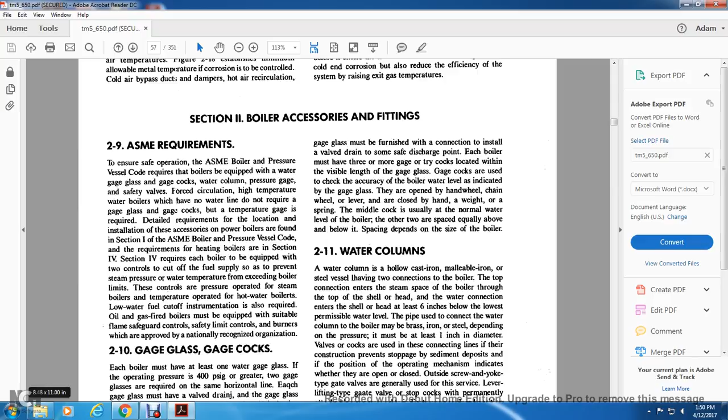Section 4 requires each boiler to be equipped with two controls to cut off the fuel supply to prevent steam pressure or water temperature from exceeding the boiler limits, a pressure-operated control for steam boilers, and a temperature-operated control for hot water boilers. A low water fuel cutoff instrument is required. Oil and gas fired boilers must be equipped with suitable flame safeguard controls, safety limit controls, and burners which are approved by a nationally recognized organization.

210, Gauge Glass and Gauge Cocks. Each boiler must have at least one water gauge glass, and if operating at 400 psi or greater, two gauge glasses are required on the same horizontal line.

Each gauge glass must have a valved drain. The gauge glass pipe connections must not be less than a half inch of pipe inside diameter. The lowest visible part of the gauge glass must be at least 2 inches above the lowest permissible water level, which is defined as the lowest level at which there is no danger of overheating any part of the boiler during operation. Horizontal fire tube boilers have the glass set with at least 3 inches of water over the highest point of the tubes.

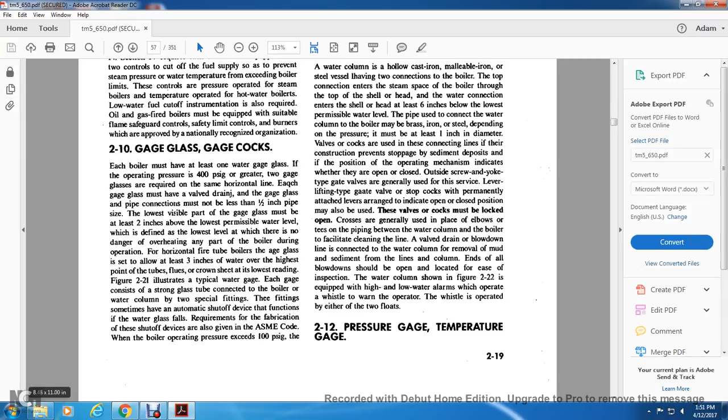Requirements for fabrication of these shut-off devices are given in the American Society of Mechanical Engineers Code. When the boiler operating pressure exceeds 100 psi, the gauge glass must be furnished with a connection to install a valve drain with safe discharge.

Each boiler must have 3 or more gauge or try cocks located within the visible length of the gauge glasses. Gauge cocks are used to check the accuracy of the boiler water level indicated by the gauge glass. They are opened by a hand wheel, chain wheel, or lever, and closed by hand or by a weight or spring.

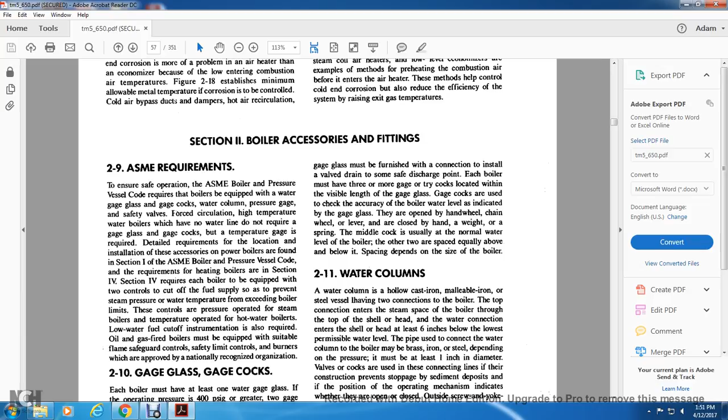The middle cock is usually at the normal water level of the boiler. The other cocks are spaced equally above and below it. Spacing depends on the size of the boiler.

211. Water columns are hollow cast iron, malleable iron, or steel vessels that have connections with the boiler. The top connection enters the steam space of the boiler through the top of the shell or head. The water connection enters the shell or head at least 6 inches below the lowest permissible water level. The pipe used to connect the water column to the boiler

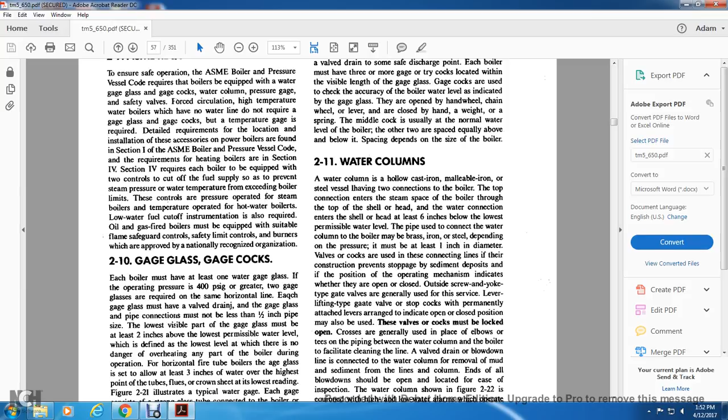may be brass, iron, or steel, depending on the pressure. It must be at least 1 inch in diameter for the valves. Cocks are used for the connecting lines if the construction prevents stopping of sediment deposits. If the position of the operating mechanism indicates whether they are open or closed, outside screw and yoke type gate valves are generally used, or lever-operated lifting type gate valves or stop cocks permanently attached. Levers arranged to indicate open or closed position may also be used.

The valves or cocks must be locked in the open position. Crosses are generally used in place of elbows, tees, and piping between the water column and the boiler to facilitate cleaning. The valve drain and blowdown line is connected to the water columns for removal of mud and sediment from the lines and columns. Blowdown valves should be open and located for ease of inspection of the water column, as shown in Figure 2-22.

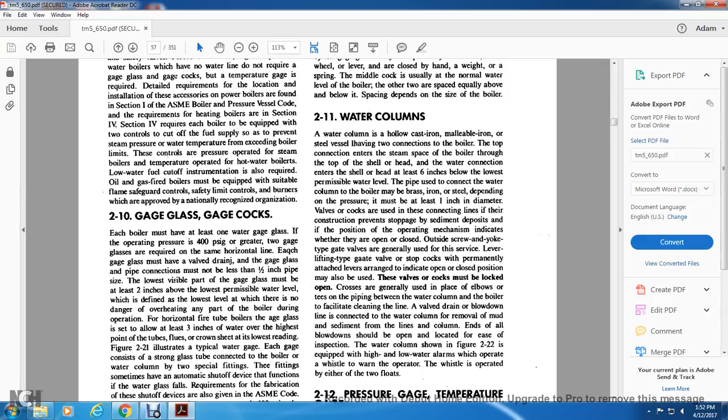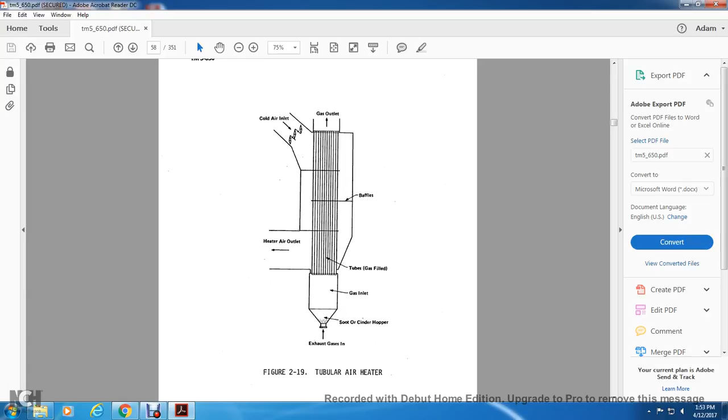This shows the tubular air heater: core and gas outlet, cold air inlet, baffles, heater air outlet from the gas, tube's gas filled with gas inlet, soot or cinder hopper, and exhaust gases in.

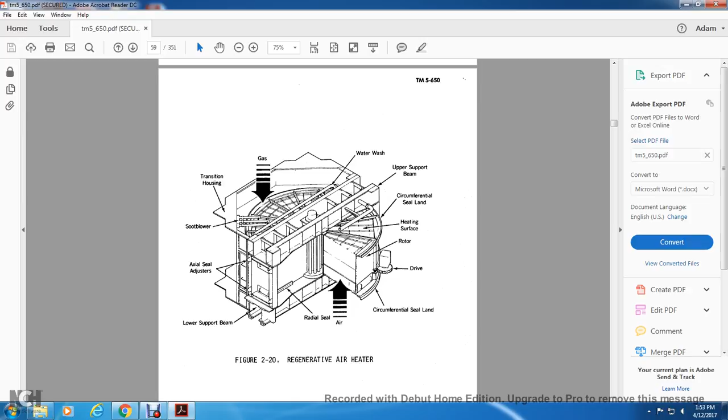This shows the regenerative air heater: transition housing, sootblower, axial seal adjusters, lower support beam, radial seal, circumferential seals, land drive, rotor, heating surface, circumferential seal land, upper support beam, water wash, and gas.

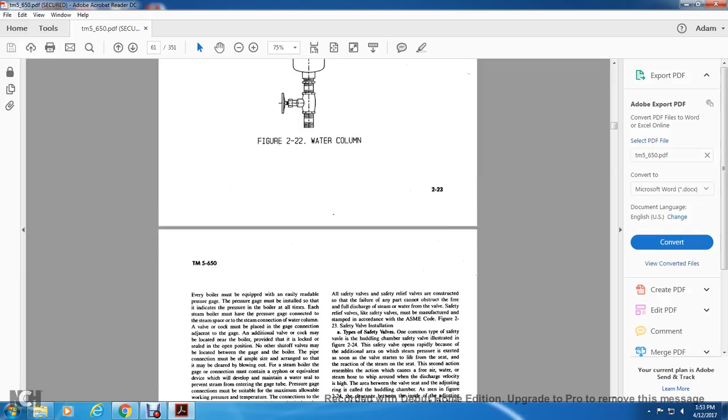Every boiler must be equipped with an easily readable pressure gauge. The pressure gauge must be installed so as to indicate the pressure of the boiler at all times. On each boiler the pressure gauge must be connected with the same connection as the water column. A valve or cock must be placed in the gauge connection adjacent to the gauge.

An additional valve or cock may be located near the boiler, provided with a lock or seal to keep it in the open position. No other shut-off valves may be located between the gauge and the boiler. The connecting pipe must be of ample size so that it may be cleared by blowing out.

The steam boiler gauge connection must contain a siphon or equivalent device to develop and maintain a water seal to prevent steam from entering the gauge tube. The pressure gauge connections must be suitable for the maximum allowable working pressure and temperature.

The connection to the boiler must be not less than 1/4 of an inch standard pipe size where steel or iron pipe or tubing is used. There must be at least 1/2 inch inside diameter. The dial of the pressure gauge must be graduated to approximately double the pressure of the safety valve setting.

This should never be less than 1 1/2 times the pressure, because every hot water boiler must also have a temperature gauge located where it can be readily connected. The temperature gauge must be installed to indicate the water temperature near the outlet connections at all times.

Section 213, safety valves. Safety valves are installed to prevent excessive pressure buildup in the boiler. Superheater and economizer safety valves are designed to quickly pop open to the full open position when the steam pressure rises to a set point, and to quickly close when the pressure drops a preset amount, known as the blow down or blow back.

The valve must close tightly without chattering or large leakage, and must remain tightly closed after reseating. Their construction, installation, and performance are rigidly prescribed in the American Society of Mechanical Engineers Code.

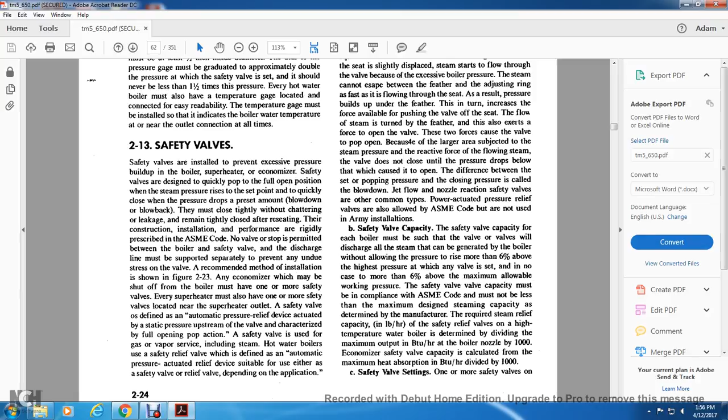The safety valve is used for gas or vapor pressure services, including steam and hot water boilers. A safety relief valve is defined as an automatic pressure-actuated relief device suitable for use as either a safety valve or a relief valve, depending on the application.

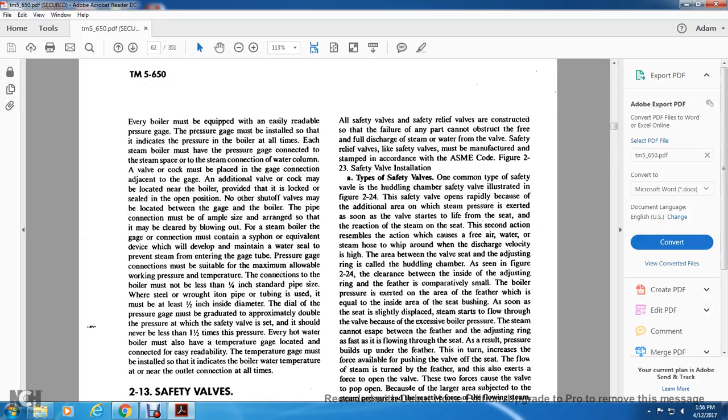All safety valves or relief valves are constructed so that the failure of any part cannot obstruct the full discharge of steam or water from the valve. Safety relief valves, like safety valves, must be manufactured and stamped in accordance with the American Society of Mechanical Engineers Code. Figure 223, safety valve installations.

Types of safety valves. One common type is the huddling chamber safety valve, illustrated in figure 224.

The safety valve opens rapidly because of the additional force with which the steam pressure is exerted as soon as the valve starts to lift off the seat and reaction steam acts on the seat. This action resembles what causes a fire hose to whip around when the discharge velocity is high. The area between the valve seat and the adjusting ring is called the huddling chamber.

As seen in figure 224, the clearance between the inside of the adjusting ring and the feather is comparatively small. The boiler pressure is exerted on the feather with an area equal to the inside of the seating surface. As soon as the seat is slightly displaced, steam starts to flow through the valve.

Because of the excessive boiler pressure, the steam cannot escape between the feather and adjusting ring as fast as it flows through the seat. As a result, pressure builds up under the feather. This increases the force available for pushing the valve off the seat.

The flow of steam turns with the feather and also exerts a force to open the valve. These two forces cause the valve to pop open. Because of the large area supported and subject to steam pressure and the reactive force of the flowing steam, the valve does not close until the pressure drops below that which caused it to open. The difference between the popping pressure and closing pressure is called the blowdown.

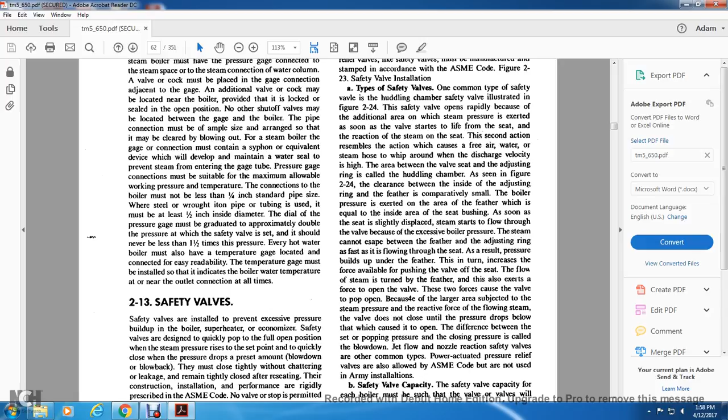Jet flow nozzle reaction safety valves are a common type. Power actuated pressure relief valves are also allowed by the American Society of Mechanical Engineers Code, but are not used in Army installations.

Safety valve capacity. Each boiler must have sufficient safety valve capacity so that the valves can discharge all the steam that can be generated by the boiler without allowing the pressure to rise more than 6% above the pressure at which the valve is set, and in no case more than 6% above the maximum allowable working pressure.

Per the American Society of Mechanical Engineers Code, safety valve capacity must not be less than the maximum design steam capacity as determined by the manufacturer. The required steam relief capacity in pounds per hour for the safety relief valve on a high temperature water boiler is determined by dividing the maximum amount of BTUs per hour at the boiler nozzle by 1,000. Economizer safety valve capacity is calculated from the maximum heat absorption in BTUs per hour divided by 1,000.

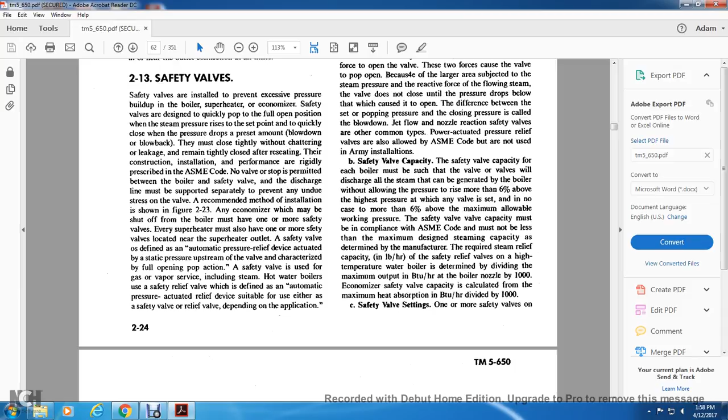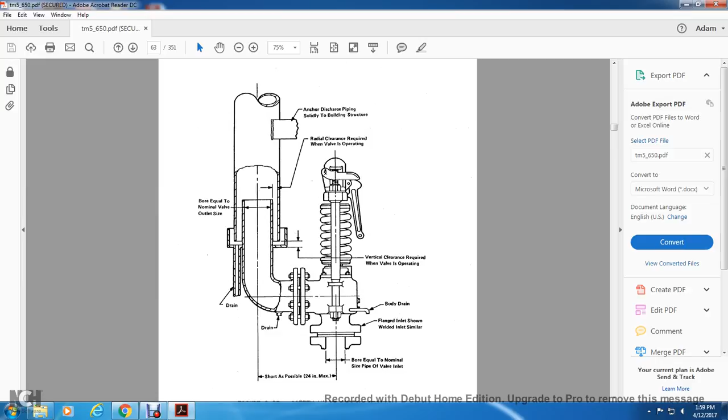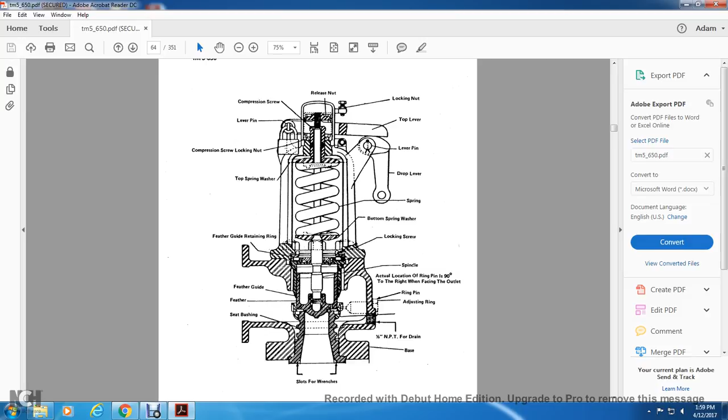Huddling chamber safety valve components: release nut, lock nuts, compression screw, lever pin, top lever, compression lock nut, lever pin, drop lever, spring, top spring washer, feather guide, retaining ring, bottom spring washer, locking screw, spindle, feather guide, feathers, seating bushing, base, 1/2 inch NPT for drain, adjusting ring pin, with the actual location of the ring pin at 90 degrees to the right when facing the outlet, and the spindle and locking screw.

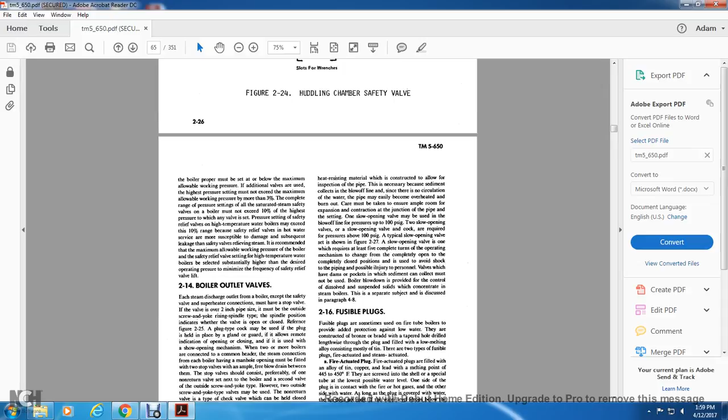The boiler must be set at or below the maximum allowable working pressure. If an additional valve is used with a higher pressure setting, it must not exceed the maximum allowable pressure by more than 3%, with the range of the proper pressure settings complete.

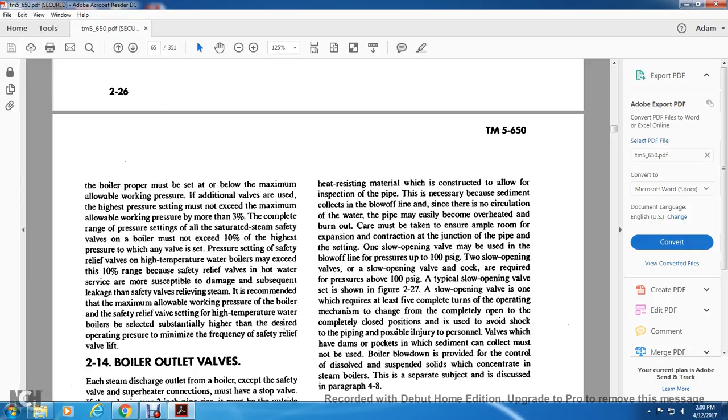2-14. Boiler outlet valves. Each steam discharge outlet from the boiler, except for the safety valve and superheater connections, must have a stop valve. The valve over 2-inch pipe size must be of the outside screw and yoke, rising spindle type.

With the spindle position indicating if the valve is open or closed. Refer to figure 2-25. A plug-type cock may be used if the plug is held in place by a gland or guard.

Always use remote indication for opening and closing, using a slow-opening mechanism. When 2 or more boilers are connected with a common header, the steam connection for each boiler and the manhole opening must be fitted with 2 stop valves, with ample free blow-down drain between them. The stop valves should consist preferably of one non-return valve set next to the boiler.

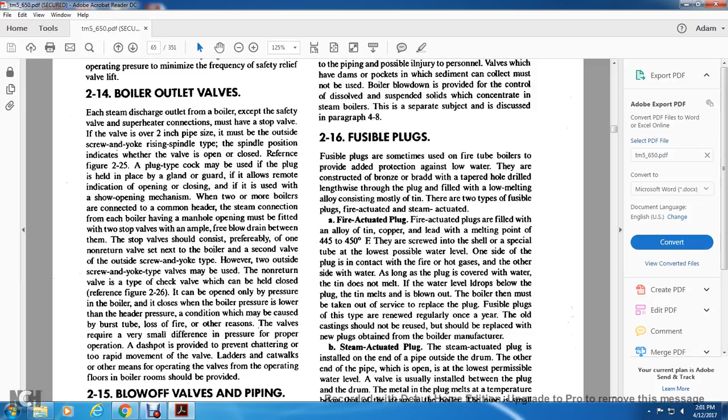The second valve is the outside screw yoke type. However, 2 outside screw yoke valves may be used instead of the non-return valve with a check valve type, which may be held closed. Reference figure 2-26. It can be opened by boiler pressure, but closes if the boiler pressure is lower than the header pressure—a condition which may be caused by a burst tube, loss of fire, or other reasons. The valve requires only a small pressure difference for proper operation. The dash pot is provided to prevent chattering and rapid movement of the valve.

Other means of operating the valves from operating floors in the boiler room shall be provided.

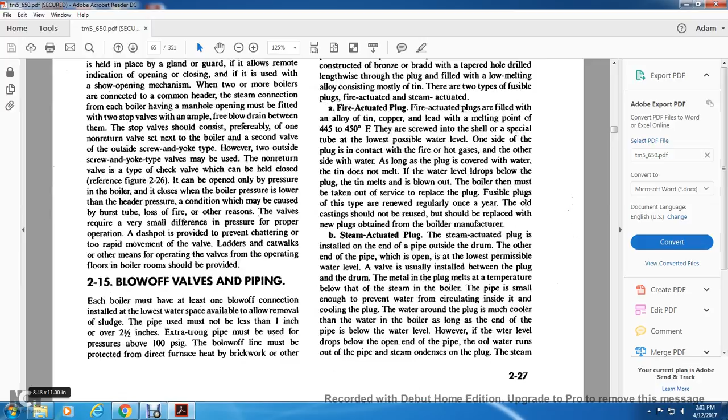Section 2-15, blow-off valves and piping. Each boiler must have at least one blow-off connection installed at the lowest water space available to allow removal of sludge. The pipe used must not be less than 1 inch or over 2.5 inches.

Extra strong pipe must be used for pressures above 100 psi. The blow-off line must be protected from direct furnace heat by brickwork or other heat-resisting material, constructed to allow inspection of the piping. This is necessary because sediment collects at the blow-off line. Since there is no circulation in the water, the pipe easily becomes overheated and burns out.

Care must be taken to ensure ample room for expansion and contraction at the junction of the pipe and setting. A slow-opening valve must be used on blow-off lines with pressure up to 100 psi. Two slow-opening valves, or a slow-opening valve and cock, are required for pressures above 100 psi.

A typical slow-opening valve is shown in figure 2-27. The slow-opening valve requires at least 5 complete turns of the operating mechanism to move from completely open to completely closed, which helps avoid shock to the piping and possible injury to personnel. Valves which have pockets where sediment can collect should not be used.

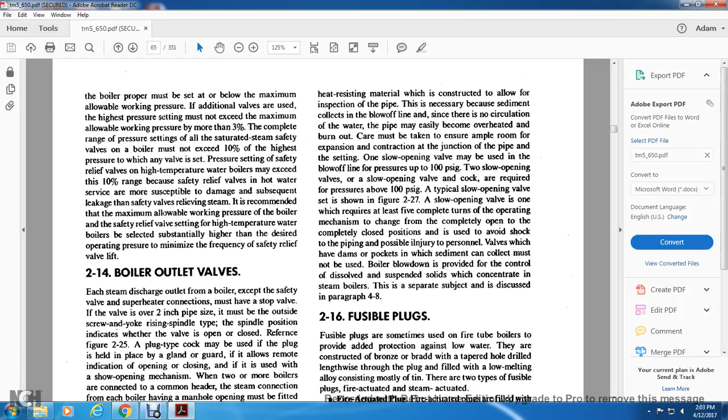The boiler blow-down is provided to control the concentration of suspended solids in steam boilers. This is discussed further in paragraph 4-8.

Section 2-16, fusible plugs. Fusible plugs are sometimes used with fire tube boilers to provide added protection against low water. They are constructed with a tapered hole drilled lengthwise and the plug filled with a low-melting alloy consisting mostly of tin.

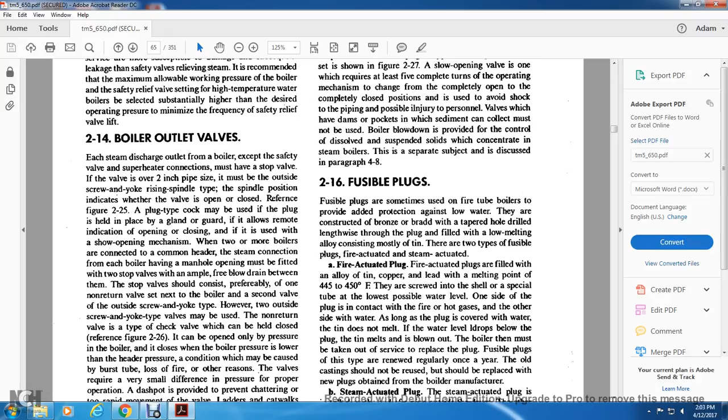There are 2 types of fusible plugs: fire-actuated and steam-actuated. For fire-actuated plugs, the alloy of tin, copper, and lead melts at a point of 445 to 450 degrees. They are screwed into the shell or tube at the lowest possible water level, with fire on one side of the plug and water on the other side.

As long as the plug is covered with water, the tin does not melt. If the water level drops below the plug, the tin melts and blows down through the plug. The boiler must then be taken out of service and the plug replaced.

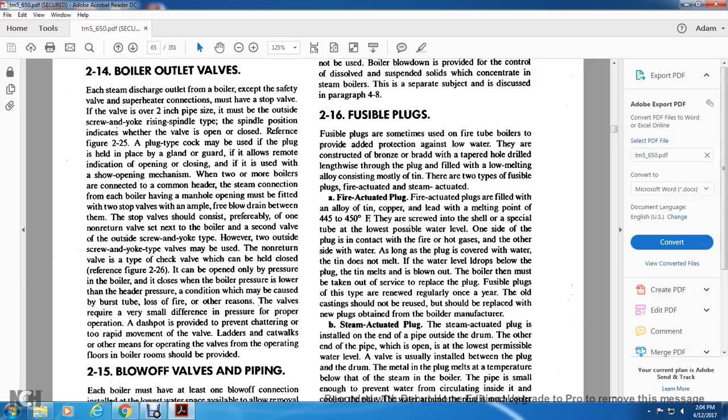Fusible plugs of this type are usually renewed once a year. The old casting should not be reused. They should be replaced with new plugs obtained from the boiler manufacturer.

A steam-actuated plug is installed at the end of a pipe outside the drum, with the other, open end of the pipe, at the lowest permissible water level. The valve is usually installed between the plug and the drum; the metal in the plug melts at a temperature below that of the steam in the boiler. The pipe is small enough to prevent water from circulating inside and cooling the plug.

The water around the plug is much cooler than the water in the boiler, as long as the end of the pipe remains below the water level. However, if the water level drops below the open end of the pipe, the cool water runs out of the pipe and steam condenses on the plug instead.

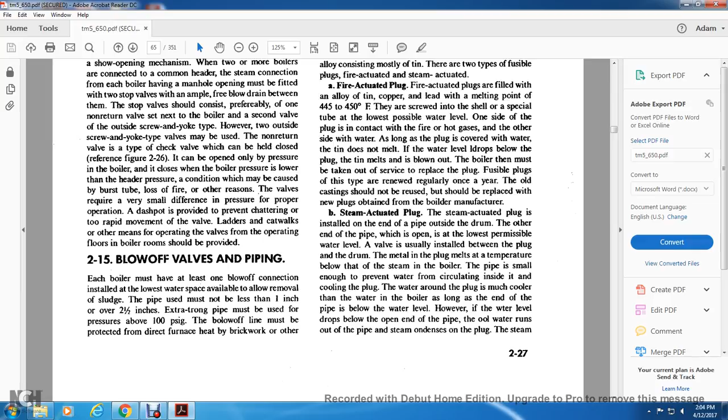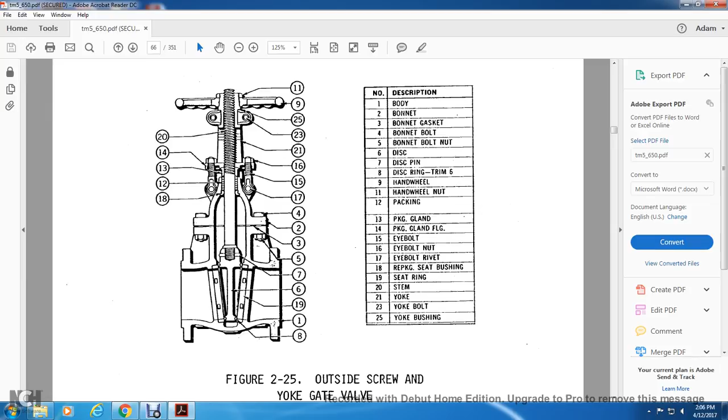20... where's 20? The stem. 21, yoke. 23, the yoke bolt. 25, yoke bushing.

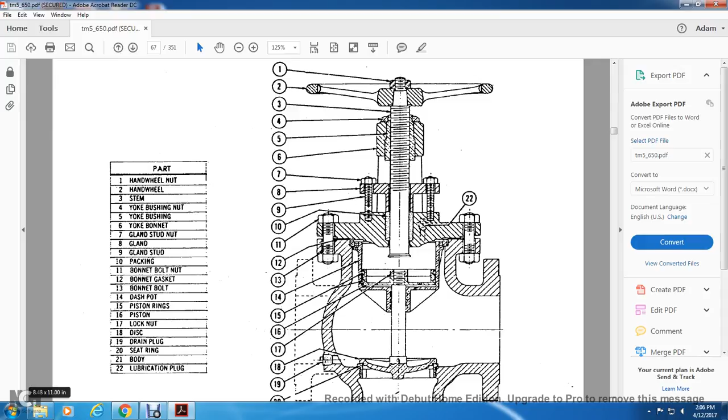This is a slow open blow down valve set.

Alright, the melting of the fusible plug: the steam melts the plug and steam blows out, warning the operator. This type of plug may warn the operator, and the plug should be replaced by taking the boiler out of service and closing the valve in the plug line.

2-17, soot blowers. Soot, fine ash and cinders can collect on boiler tubes, causing a substantial decrease in the heat transfer rate, since soot is a very poor conductor of heat. Additionally, extensive amounts of deposits on the tube passages can become plugged and restrict gas flows.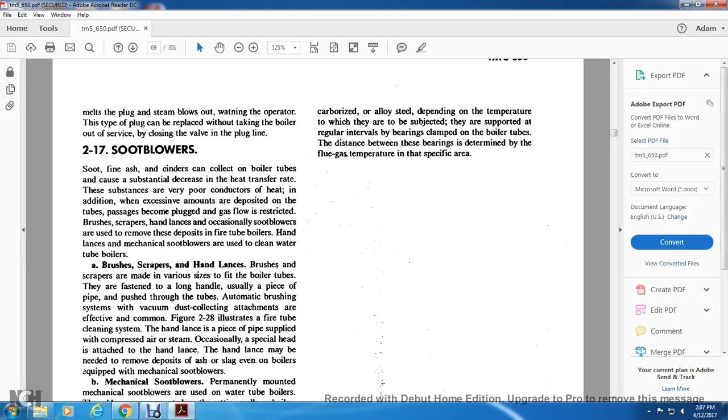Restricted passages are cleaned with scrapers and hand lances. Occasionally, soot blowers are used to remove deposits from fire tube boilers. Hand lances and mechanical soot blowers are used to clean water tube boilers.

Brushes, scrapers, and hand lances are made in various sizes to fit the boiler tube. They are fastened to a long handle, usually a piece of pipe, and pushed through the tubes. Automatic brushing systems with vacuum dust collection attachments are also used. Figure 2-28 illustrates the fire tube cleaning system.

The hand lance is a piece of pipe supplied with compressed air or steam, occasionally with a special head attached to the end. The hand lance may be needed to remove deposits of ash or slag, even when the boilers are equipped with mechanical soot blowers.

Mechanical soot blowers. Permanently mounted mechanical soot blowers are used with water tube boilers. The blowers are mounted in the setting wall of the boiler support structure at several points to clean as much of the surface as practical.

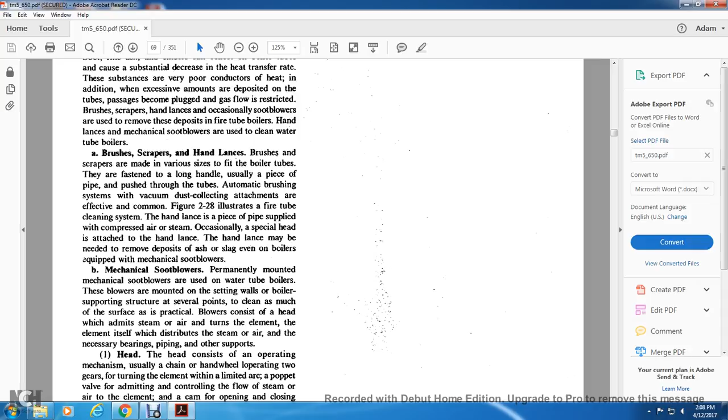The blowers consist of the head, which admits steam or air into the element, and the element itself, which distributes the steam or air through the necessary piping, bearings, and other supports.

1. The head. The head consists of an operating mechanism, usually a chain, hand wheel, or lever, operating the gears and turning element, a limit dog, and a poppet valve with a controlling cam, which controls the flow of steam or air into the element by opening and closing the valve.

Reference figure 2-29. The poppet valve is adjusted at the start to obtain the proper steam or air regulation. The cam is adjusted to establish the proper blowing arc and prevent steam or air from striking and cutting the baffles, drums, and headers.

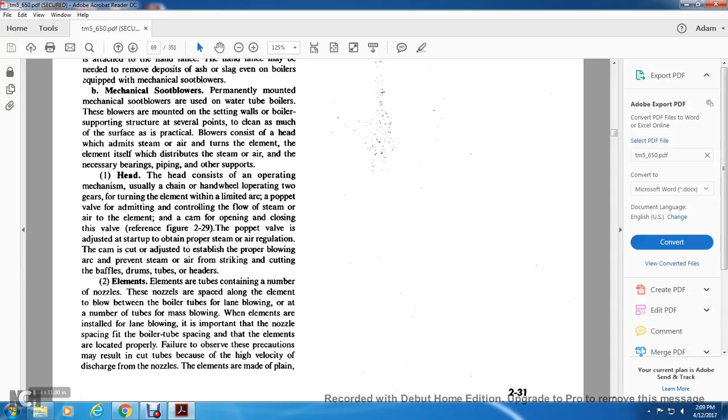The nozzle spacing must fit the boiler tube spacing so the elements are located properly. Failure to observe these precautions may result in the tubes being cut by the high velocity discharge of the nozzles.

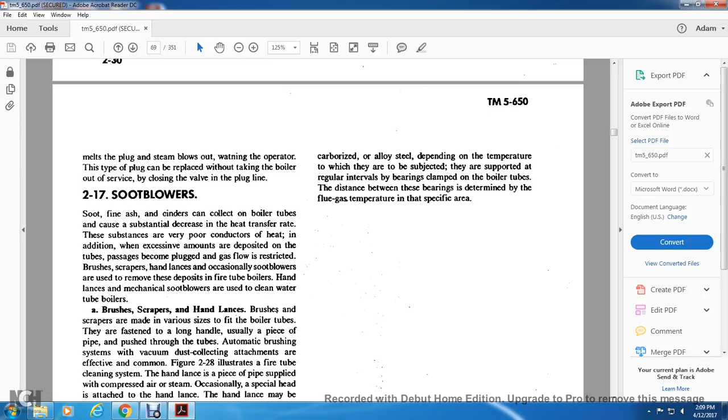The elements are made of plain carbon or alloy steel, depending on the temperature to which they may be subjected, and are supported at regular intervals by bearings clamped to the boiler tubes. The distance between the bearings is determined by the flue-gas temperature in the specific area.

Figure 2-28 shows the fire tube cleaning system. You have your boiler tool, your steel brush that travels the full length of the tube. The spring steel tube nozzle carries the weight of the machine, the carrying handle, and the trigger.

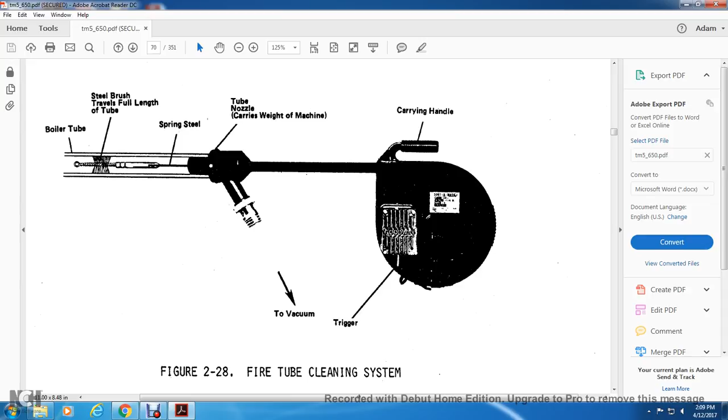Section 3: fuel handling and combustion equipment.